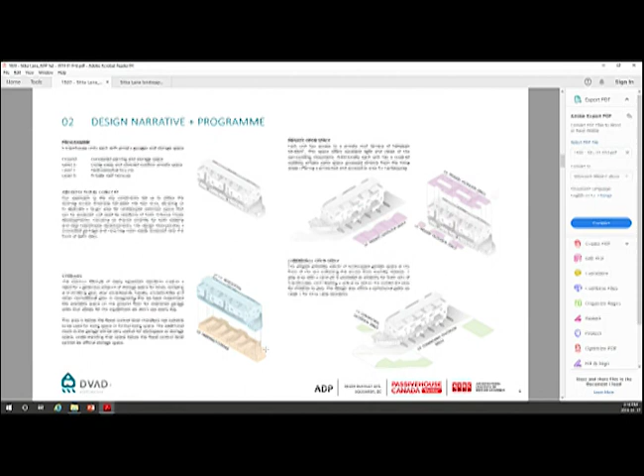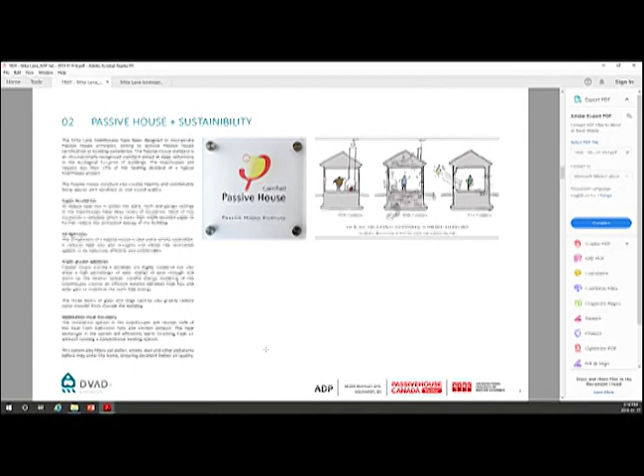So yeah, that's basically the bulk of it. I'll go through the rest. I'll touch now with you guys on what is passive house. I think most people here have probably heard about it, or read up on it, and experienced it in some way.

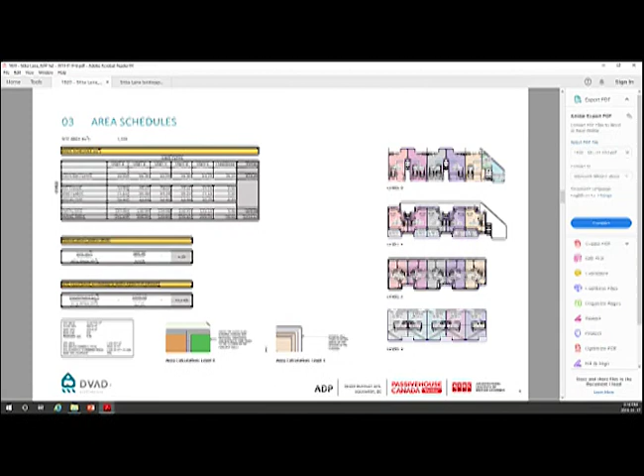At present, area calculations in Squamish are done as 165 millimeters from the outside of the wall going inwards, whereas most other municipalities work at 165 millimeters from your drywall out. This means that in Squamish, we actually have a significant amount of area, GFA, sitting in our exterior wall because our walls are so thick.

I'm going to quickly touch base with you guys on the variances. On the street side, that little red corner you see there is our variance requirement for the front setback for the building, which is basically all insulation. Yes, it is possible for us to cut off that corner, but it will just create an awkward looking, funny, expensive corner with no benefit to anybody.

On the back side of the lot, we have the 2x6, or the structure, sitting inside the setback, and our additional insulation is sitting outside, and that's what the variance is for there.

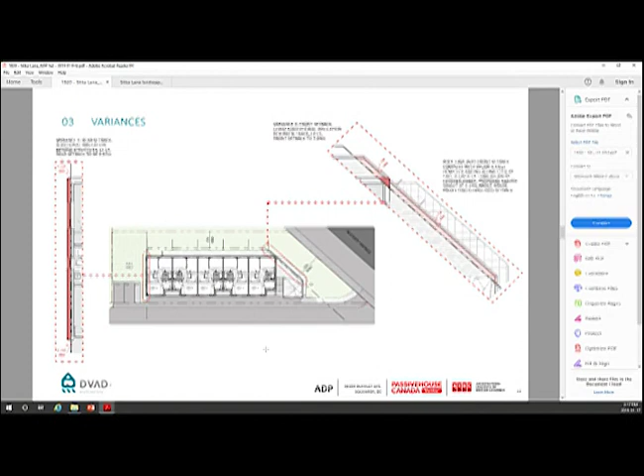Here's a comparison for you guys between a 2x6 on the left-hand side, the passive house standard floor assembly in the middle, which is basically an 18-inch joist, or in exceptional circumstances you can do a 16-inch joist, compared to where a BC building code will be 9.5 or 11 and 7/8 inches.

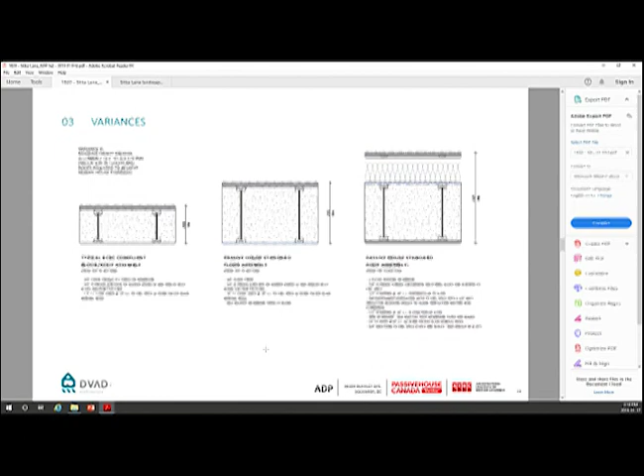You can see there's a very big difference there. The last image is a passive house roof. You've got an 18-inch TGI joist, and on top of that a 2x10 causing the overframing, because this is vapor open to the outside. That means 18 inches plus another 9.5 inches, so about 27.5 inches thick roof assembly, compared to a typical BC building code assembly of 9.5 or 11 and 7/8 inches. That's why we're asking for a variance of about 10 centimeters, or 4 inches. It's very small. All our floor to ceiling heights are 8 feet, there's no oversize. This is basically the minimum we can do, and this is where we end up - just so you understand why we're asking for this.

We did a comparison - not 100% accurate, but close - of the lots separately, Arbutus Grove and Sitka Lane, and the two together, looking at what works better. All in all, it seems like a really good option for both projects to work together and create some shared services.

From a building code point of view, it's exactly the same as the existing 4-story townhouse on the site, although all of our living space only starts on the 2nd story.

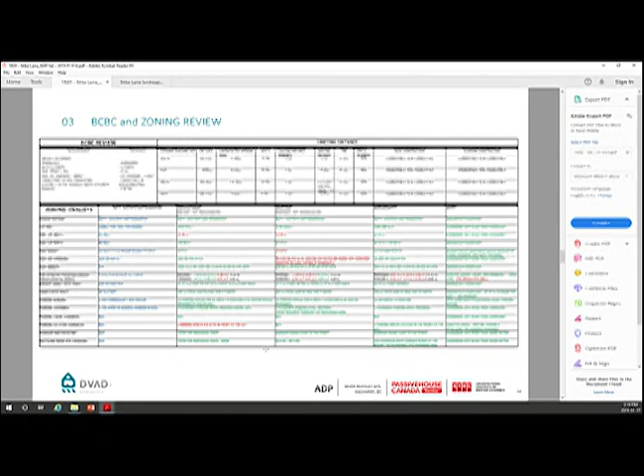I think you have to use the mouse anyway. I'll use the mouse and it shows up on both sides. Oh, I see.

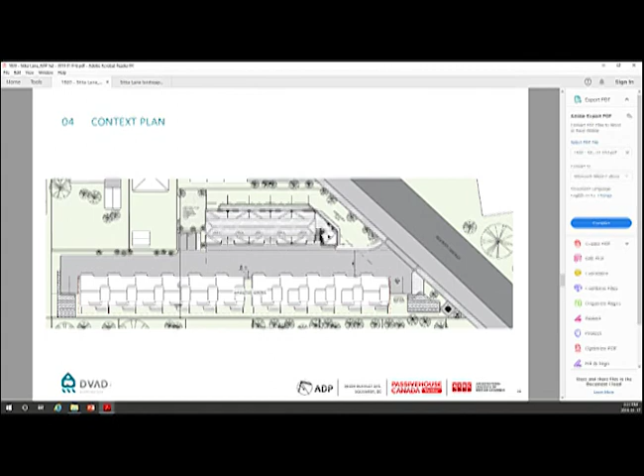Here you can see there's a main staircase going up, then two other staircases between these two units and these two units. The 5th unit at the end will have a general staircase, and all of these are connected at the top - I'll show you guys in a moment.

Here is the shared recycling and garbage area, and a mechanical room that will basically serve the whole building.

Guest parking spaces over here. The other accessible parking lot, that would have been part of the house, is now taken care of by the one existing in our previous program. There's individual private backyard space here, accessible through the garage of each unit.

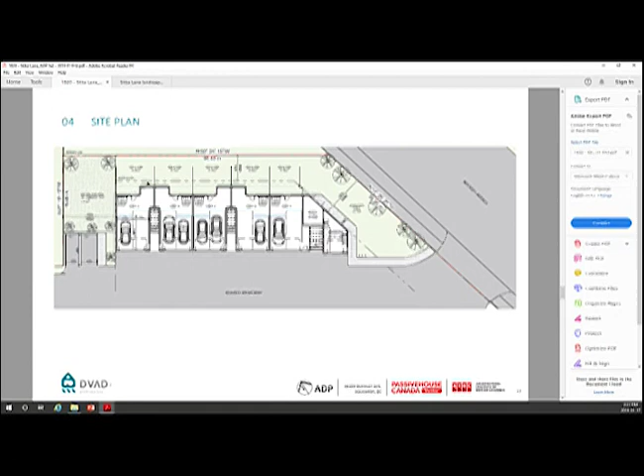Just the basic area and layouts you can see: garage, then living, dining, kitchen on top, bedroom areas, and then the rooftop deck, which I haven't spoken about much. On this floor, the rooftop deck creates close to 1,000 square feet of private outside space that will be very sunny - morning sun on the north side, good afternoon sun on the south side. In this case, we're actually able to create a very small bump out in the building without compromising the Passive House, just because there's no concrete like we have in the garage space. That's what makes it difficult to do on the ground floor.

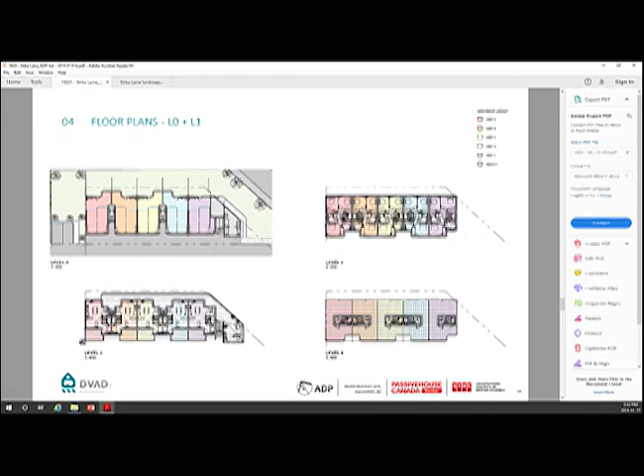From an elevation point of view, you guys can see that our building definitely looks a little bit more bulky than what the neighbor's does. This isn't modeled in the same amount of detail, but you can see that our building is the same height, very, very close, but definitely a little bit wider. The extra width comes basically from us not having to have our own driveway.

So we give them garbage and recycling and extra guest parking and all those things, and they give us some shared driveway space. This just shows you guys some more massing. The staircases become quite complicated because they're stacked on top of each other, and you still have the one that moves up between the garages.

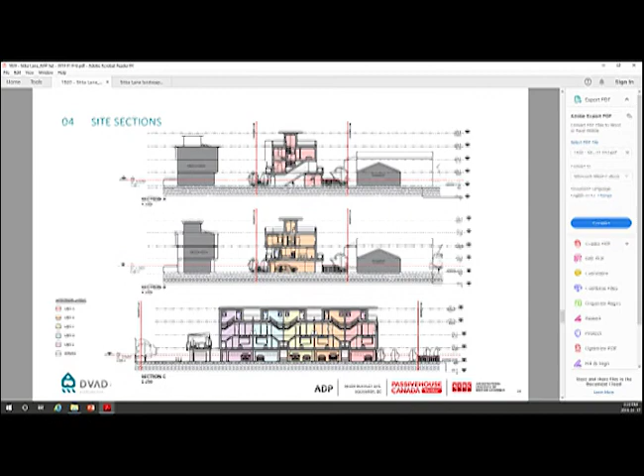From an elevation point of view, the idea is to use exactly the same finishes as what is on our Builders Grove at the moment - the same shingles, the same colors. We have samples here of everything that we can show you guys, and we have a few options that we wanted to discuss with you guys for the ground.

From a floodplain point of view, it's really great to use the concrete. There can be a flood, and tomorrow everybody goes on with their lives - there's just no damage. The other option that is used, for instance, at the moment at our Builders Grove, is normal stick framing, drywall siding on the outside, and it's reasonable, it's acceptable, but it's not a great solution.

So the option that we wanted to mention to you guys is CLTs. This is basically an option that can replace the bulk of the concrete there.

We will keep the concrete around the recycling room and the mechanical room just because they have a tendency to wear and get bumped and things like that. But around the garages, there's an option for us to use this.

It is environmentally friendly, it is very durable, it is less expensive than concrete, and we only have to cover the outside of this just because this look is a little rough for some people. But from the inside, electrical is run like in a commercial application, just BX conduit that is enclosed, and no one cares because it's in the inside of the garage. But we don't have all that concrete and all the CO2 that goes with it.

So this is something that is not in our drawing, but we would like to get you guys' feedback on it. It's a little bulky and heavy, sorry - don't hurt yourself with that. So it's basically just 2x4s that go in both ways, and it forms a slab and very big walls, and we see this as a great application for this instead of using the concrete.

From the elevations point of view, the units will all have a nice big deck on the main floor outside of the living rooms that is south-facing and covered. So if you have a barbecue or something like that, there's space for that. With very big windows, the bedrooms are set above that - the whole private area in your house is set above that. And then obviously the rooftop decks at the top.

Considering that we don't have a driveway on this side, it could add a lot of three-dimensional steps into this so that it's not a big blank face, which the mechanical and garbage area already kind of moves the building back a little bit. So there is some movement in that elevation already.

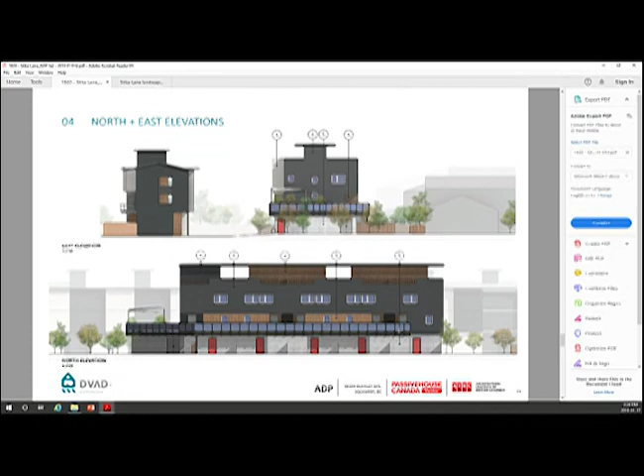From the back of the property, you can see the walkway that forms all the way along. As you go up the stairs, there's a general connected walkway that basically allows all the units to be connected. So when you go up the stairs, you can go left or right. You can use any of the stairs to get to any of the units until you go inside the front door of the unit itself.

Materials basically we're matching what is at our Builders Grove at the moment, so there's no surprises there. And we understand that the character of the building is different, but we want to show that this is part of the same family, basically in the same neighborhood.

But the 3 or 4 years difference in when they were created will be reflected in how they look.

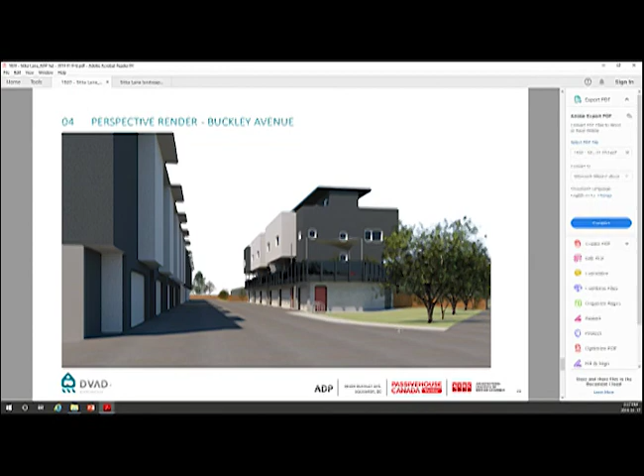Kind of a perspective of where you will come in, and you can see the difference between the two buildings.

This will basically be the man door going into our garbage and recycling, and then there's a garage door for easy access for the garbage truck to move away. At present, totes are being used. People store them in the garages and then have to bring them out, and the garbage truck backs up down the road, which isn't an ideal situation. So this will be a very big upgrade for both of them.

You guys can get a feel for what is happening with the scale there. Big open yard in the front here. Yeah, and that's pretty much where we are.

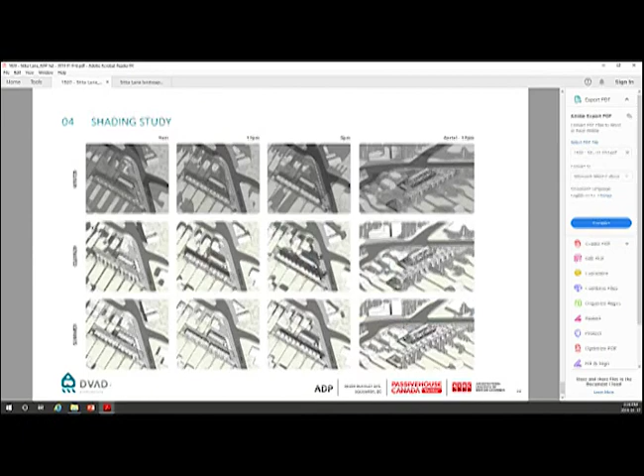Landscaping. So this is our sun study that we've done, so you can understand what happens during the different phases. This doesn't have any adverse effect on the neighbors more than any other townhouse project would have. Understanding that most of the winter it's dark anyway, there isn't much effect outside with great sunlight. In summer, spring and fall, there's very little shade going over to the neighbors, or unreasonable shade.

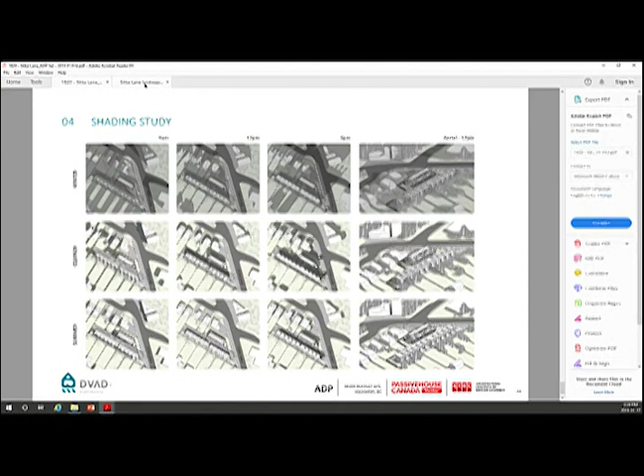How do you... Seem to have lost the landscaping file.

Can I do a small public service announcement while you guys figure it out? Just because I know we have a lot of new members. If you live in Arbutus Grove or right adjacent to the property, it's probably a conflict of interest. So once we go into the question and comment period, I think it'd be best if anybody here who lives in or adjacent to it steps away. We have no financial gain out of it. So why would it be a conflict of interest? You would be an affected person essentially. Okay, but we still have no financial gain out of it. No, conflict of interest is not just financial. It's pretty typical to step away from the table if you're affected by the project.

Derek was right in saying it's a bit of an unusual project to suddenly approach, and we worked on our Arbutus Grove project and it was fairly successful. Looking at this, there's purposely not a lot of landscape per se. Each unit has a substantial, good back area, so our first decision was to leave that basically as lawn. I didn't want to take up room with a major hedge across the back. I wanted some sort of perimeter planting, with the opportunity for people who live there over time to take care of that space themselves or enhance it or work with it.

The second part was the streetscape and the trees. We had deciduous trees and added some conifers. I wanted to be cautious about conifers in a small area given the huge size they can become, so these are yellow cedars that have a more narrow character and are slower growing. I felt the lawn area was a good idea, a simple kind of open space that most projects of this nature don't have.

And then the third one was a little more interesting, a bit of a conundrum: this space labeled play structure. Thinking about it, I considered that this would be toddler oriented. If it's older kids, 5 and above, 6, 8, 10, they're probably not going to hang around there, they'll go across the street to where all the schools are. So then you're into a toddler sort of adventure play or natural play, which has a lot of connotations for what it could be. The owner had visions of major log crawling, almost acrobatic in a sense.

But I looked at projects we've done before. This one here is across the street at Stan Clark Park, and it's quite successful. You can't see the picture very well, but it has a vine maple, shade, logs and little pathways through it. It's for kids to use. And this is in the athletes' village at Cheakamus Crossing.

This extra 3 meters here between the property line is going to make the turnaround significantly easier. Oh okay, so you can just pull a turnaround anywhere. Have you done the maneuvers on those? No. But if you go from 6 meters, which allows you technically for a 3-point turn, up to 9 meters, it's pretty reasonable, which you'd think would be better.

So the garbage truck will have to nose in from the street and then back out onto the street, right? Absolutely, and that's why the garbage was put on this side, so they can do it in a very short period - whereas before, they had to reverse all the way to the last unit, pick up that last load, and then go back out. Good, no, I think that makes good sense.

So the building is obviously very passive. I'm not seeing that same kind of love in the landscape. What are the kind of energy saving and environmental moves and green moves on the site that the building is making? What are you doing to reduce energy costs, improve the environment, stormwater management, roof drainage, all those kinds of things on the site? I don't see the site being consistent with the building.

And its approach. Well, the storm drainage is an extension, if I understand it correctly, of what was determined and figured out for Beavis Road. Because we're able to share the roadway, we don't have to build any extra storm systems. Our civil works have already confirmed that we can just tie into the existing storm system, so there'll be no more manholes, no more pipe going in the ground, no additional infrastructure required for this project to combine with the neighboring project. Okay, good.

The roof structure on top of the sun deck at the very top, does that connect all the way across? Yes, so it's a covered space between the vestibules that come up. There's just staircases that come up internally, and that's part of a covered little space between the two units. Two units are back to back, so that situation occurs there and there - that covered area occurs. Here you have a little bit of an overhang, and there you'll have a little bit of an overhang. That's just in the overframing, in the 2x10 part that goes over the TJI joist on the inside.

That's all I have, thank you. Is there any thought put to including a provision for this building to be net zero, just with the addition of conduit or something to allow for solar panels? The developer actually expressed some interest in adding solar panels, which we're very interested in doing, but at the same time we want to take one step at a time. When we get your support for this, then it's worth it for us to look at taking this even further - whether it's like what we did at the other project where we were able to change the site drainage, which was a very big enhancement for us.

The addition of solar panels is a very small step to take this to net zero. We'll have to come back and see planning about this, but from an actual cost or running perspective, it's very straightforward, very easy to do. Right, so you would have to come back because it would require another height variance, form and character. I don't know what mechanical stuff is on the roof, it's not technical, I haven't looked at that. They'll want us to come back. Yeah, it'd be great if you could be pre-approved for something like that, but that's just a comment, and I'll stop there.

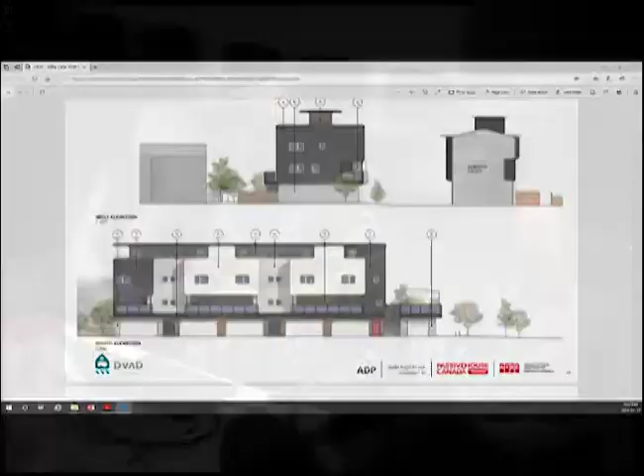But I was also wondering about the size of the windows, which might solve some of that massing question staff is asking, and also about livability and access to light in the unit. I want to give you the size of that window, because the bulkiness comes when you put this extra 12 inches of insulation around the building, which makes the windows look smaller. Let me just ask a quick question here.

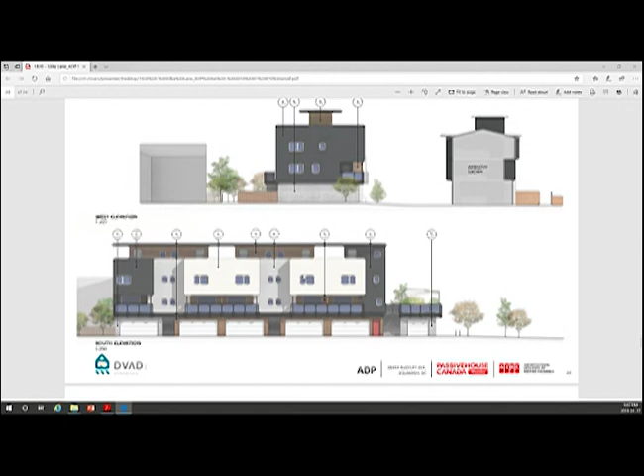The small one's 2.5 feet in width by 3 feet high. So the window is 30 inches by 36 inches. Those small ones there, and the bigger ones are 3.5 feet in height by 3 feet, and 3.5 by 3.5 in height. So the windows are actually a reasonable size from a user point of view, from inside the room, but from the outside they tend to appear a little smaller.

I want to zoom in here so I can show you the window we've put in the living room. That window goes up to 18 inches off the floor and fills that whole space. That's the main living area, the upper main living bedroom area. Unfortunately it doesn't show really well here, but it's something we're very aware of, because there is part of that stigma about passive houses having small windows, and it doesn't really apply here. It's a very important part of the process.

It's a big window, but you still got that overhang over it. Yeah, okay, that helps a bit.

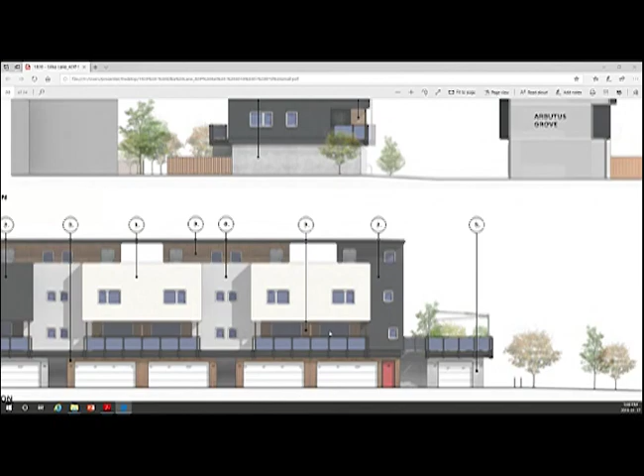I'll be quick. The only other question I had, most has been answered, just about the rooftop decks. Have you considered any privacy screening between those two units, like planters, opaque glass, or something that gives some separation? Yes, we just haven't done anything about it yet. I think that'd be important. We're aware that there will be something there. Yeah, it's an important consideration. I'll note it in that comment.

Is the intention for cars to actually turn in that driveway lane to get into Arbutus Grove? Will cars be turning across that driveway lane, or will that be kept free at all times? For fire access, it must be kept free, so there's no parking in that one. So you're not worried about owners parallel parking in front of their garage? No, there will be a sign, and if they violate this, strata will have them towed. Otherwise, the fire department is going to...